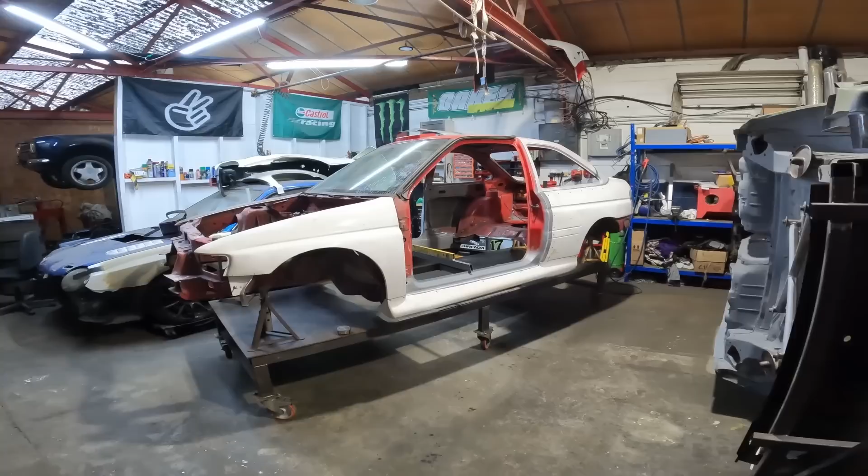For those new to the channel, this is my 1992 Ford Escort Mark V RS2000. We bought it sight unseen off the internet, a Cosworth replica, and as you can tell it hasn't ended well. It's escalated quickly from what should have been a tiny project into a rather large one. We've fixed rust, and more rust, and put so much new metal back in it's almost a new car already. But unfortunately most of the rust was in the floor, which we've cut out, and that's why we're going for a tube chassis.

So we've got a bunch of tube down here, 38mm and 45mm.

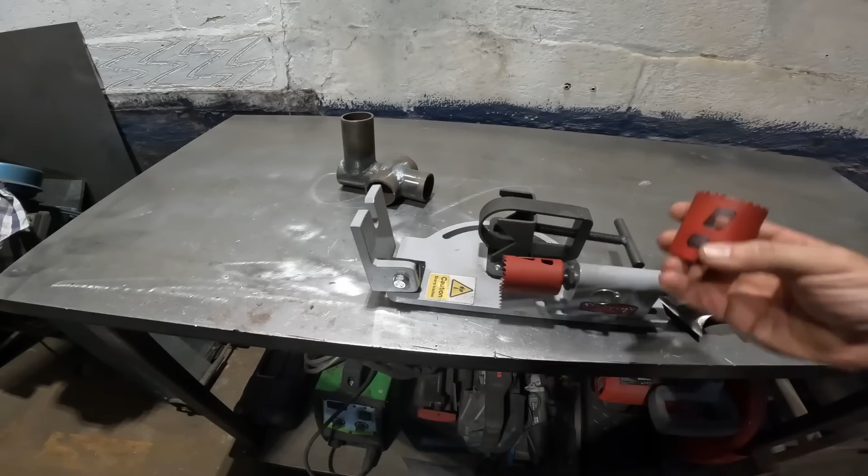We've also got a tube notcher. If you're unfamiliar with what a tube notcher is, you basically put a hole saw in the end there, put your tube through, then put a drill on the end, and hole saw through the pipe, which leaves you with something looking like that. Then you can put your tubes together like that and weld round to make it all as one.

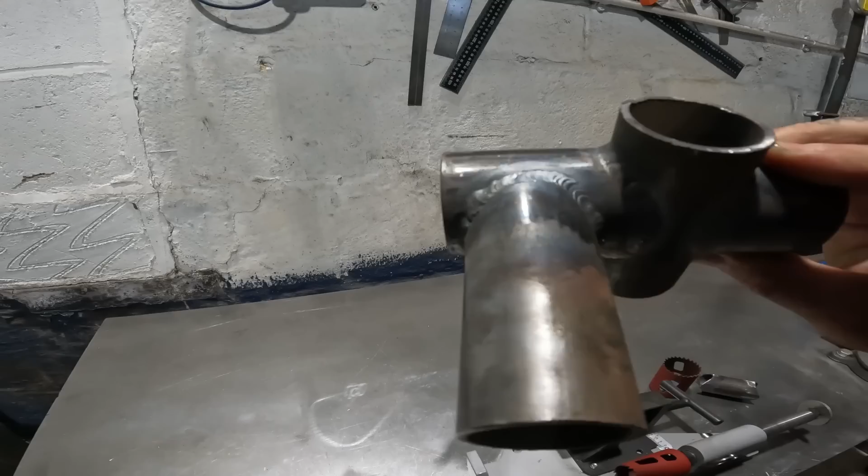Now I've already practiced because I'm TIG welding all this, so far so good. I do need a bit more practice, which is why I've cut some more of these pieces - we'll be going back to this shortly for a bit more practice. But I think without further ado, I need to put you on a tripod so we can finally see what's going on in that box and try and figure out this tube bender stuff.

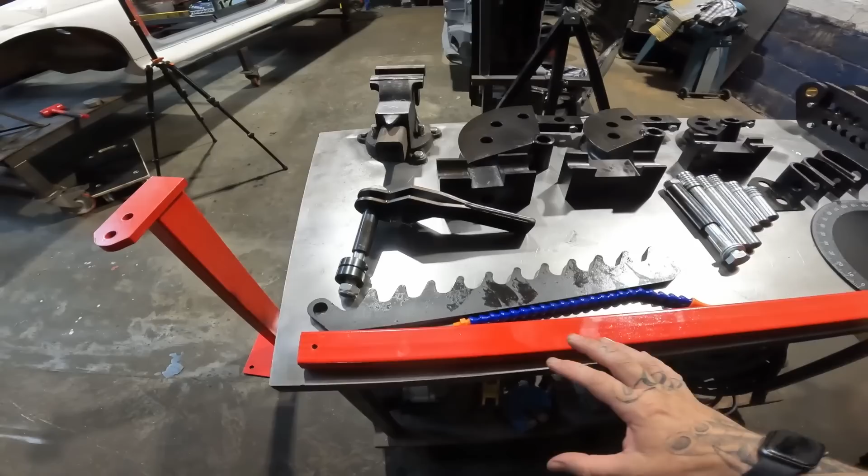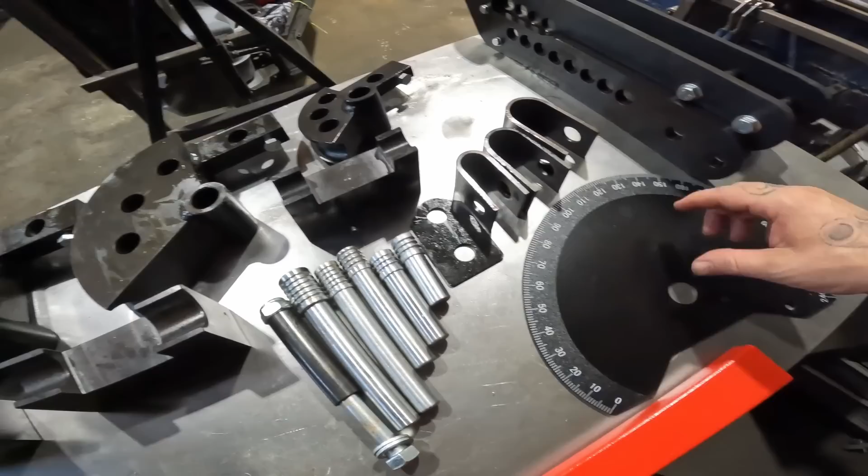Well guys, if you're a big kid at heart like I am and used to like Meccano, you'll understand why all this makes me so happy. We've got a big old Meccano set right now - an 1.75 inch die, 1.5 inches, and 1 inch. We've got all the associated straps, all the bits and bobs, these little bits that slide in through here, and our degree disc which points to tell you which degree you're at when you're bending.

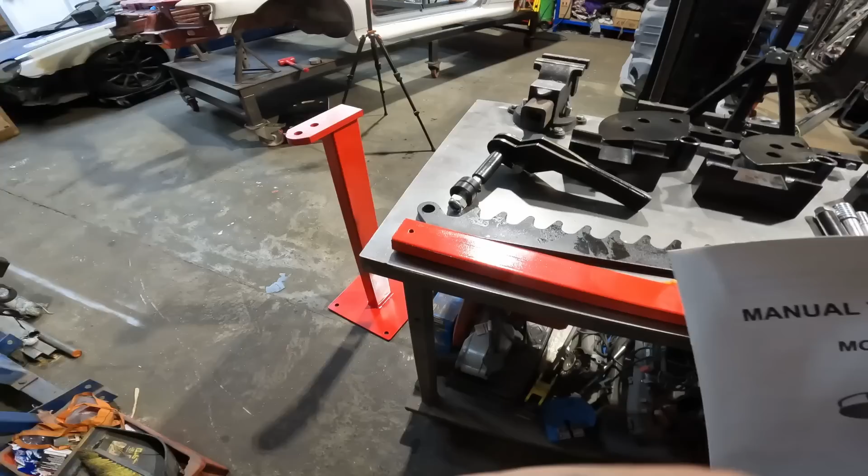We've got a lot of stuff, but I think for once in my life I'm actually going to read the instructions and see how I go about building this thing properly, because I don't fancy it falling over or coming apart whilst I'm trying to bend a tube - that would end very badly. So I think I'll pick you guys back up once this is all assembled and we'll pop a tube in there and see how well it bends some tube, shall we?

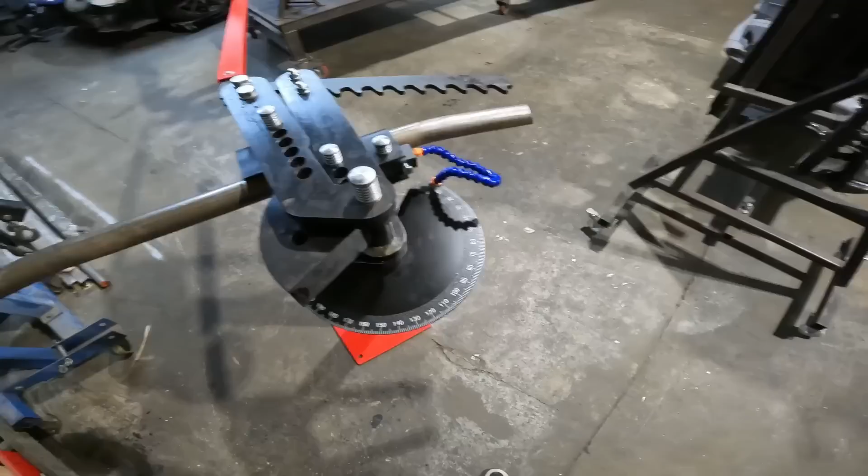Look at the size of this thing, man. It is absolutely huge, what a beast. It weighs a ton as well, but it is such a cool contraption.

Obviously you've got all these pins here, these lock various things into place. I'll go through it more when I start pulling bends on it, but this is your indicator of what degree of angle you've pulled on the bend.

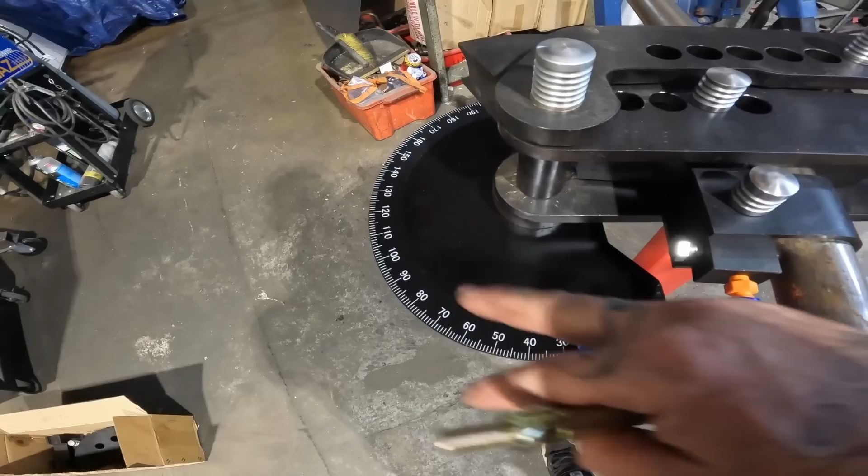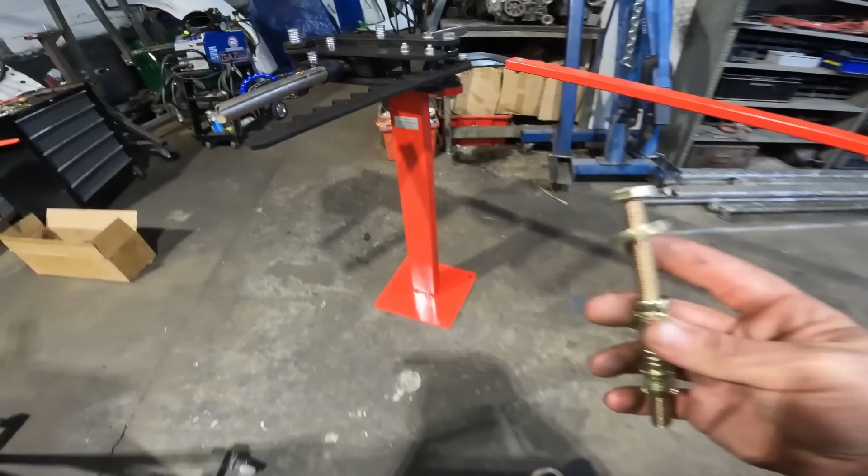That is as far as I can go with it for tonight, because unfortunately I bought these little M10 bolts to fix it down. However, now I've got it out, there's a lot of wiggle room on that, so I think I'm going to change these to M12s, because I don't really fancy pulling on this and then this shears off, everything topples over and I have a real bad day.

So we're gonna get some M12s tomorrow. We'll fix it down here, which then will give me enough room to have the handle going that way to pull back that way. The tube can then shoot off down beside the table here, and then I've got all this space here for the bend to form in. So all in all, it's actually worked out quite well, the location I'd planned for this. I'll pick you guys back up tomorrow once I've got some new bolts, and we'll send it on this thing and see what happens.

Alright then guys, we are there. We've got our M12 bolts, we have got a 20mm drill bit to suit said bolts, and we've got these square washer plate spacer things, because as you can see, the tube bender is currently not level, so we need to pop a couple of these underneath this right hand side to level it off, so when I pull my main hoop, the left hand side of the tube is going to be at the same plane as the right hand side, because otherwise you'll have wonky feet and it'll look a bit pants.

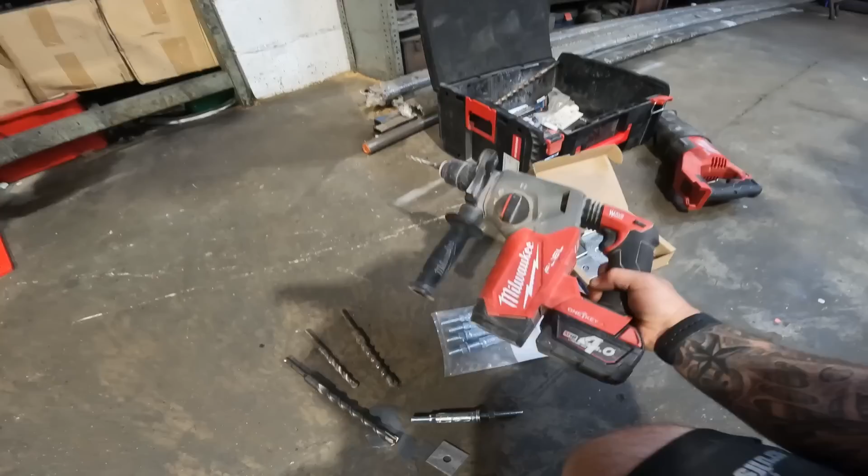But what we're going to do, folks, is we're going to go through with a 12, 16, and then finally the 20, just so I don't go murdering that 20mm drill bit on the first hole. So we'll step it up in stages, and hopefully that'll keep all drill bits looking a bit more happy for a little bit longer. I'm going to put my headphones on because this is going to get dead loud dead quick, and let's send it, see what happens.

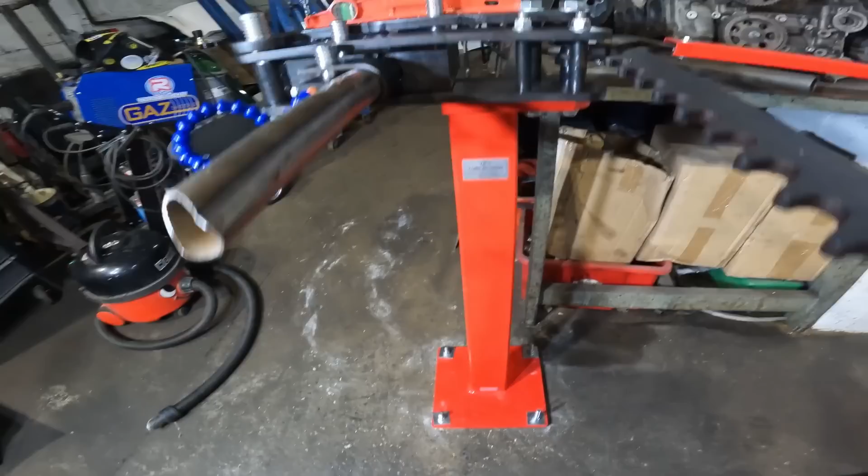We are ready to party, folks. It is fully bolted in, just need to cut the tops of the bolts off, and we are fully level. Can't get better than that.

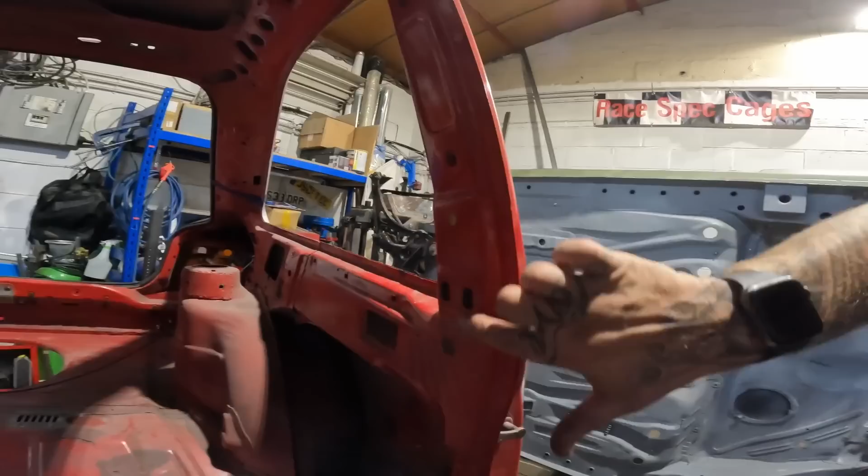So I just need to pop John's bit of scrap tube out here and then chuck in my bit that I've just cut, and we shall pull our first 90, which I need in order to get certain angles and measurements for making bends and things like that. So let's pop this tube out, I'll chuck the other one in and we can pull our first bend finally.

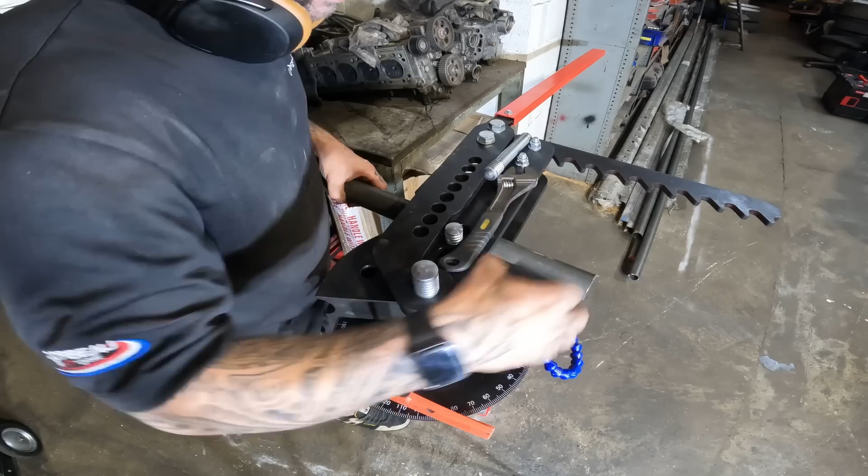All right, let's see if I can show you guys how this thing is all set up. So you pop your tube in there, pop your strap round the tube, then you've got a pin that goes in there. Bit of a pain sometimes to line up, but that is in there. And then you've got your former bit that follows the bend around there, which is underneath. Pop the pin through that. There we go. And then when you've got all of that in there, you've got this little nut or bolt here, tweak that up so it's nice and snug. And essentially, at that point, you're ready to go.

So next step after that then, you've got to take the slack out of the tube on all of this die and whatnot. Make sure you're zeroed. And then go full send. Let's do it.

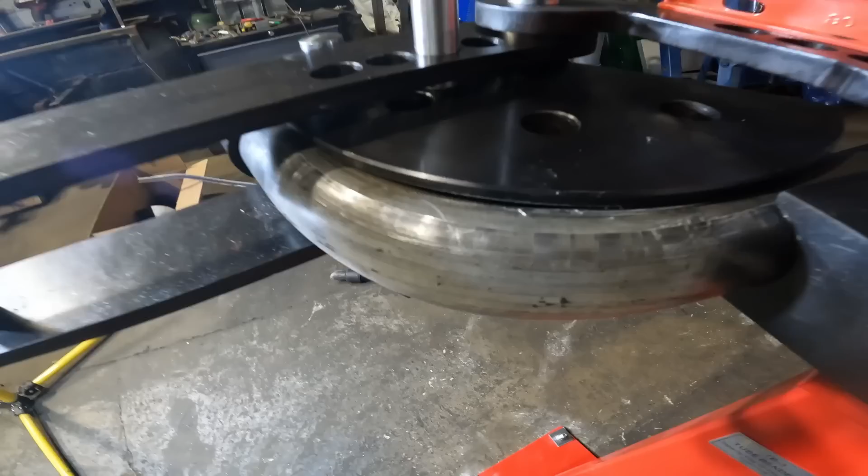Well Houston, we have a little dilemma. I don't know if you can really tell on camera, but once you get to 70 degrees, the tube doesn't want to follow the die and it just starts trying to punch outwards, which in turn is kinking it. So this is my second attempt. This is my first attempt, and again, at 70 degrees, it done that. So I thought, all right, maybe it's something I've done. So I cut another bit of tube, chucked it in, 70 degrees, done the same thing. Not only is it doing that, but it's also heavily marking all this tube.

So there's these gouges around here. It seems like every time you stop to ratchet it back, it leaves another gouge. So it's got to be something to do with this die here, digging in somewhere.

Overall guys, I'm not very happy with this thing. I've spent a lot of money on this and it's just not working. Build quality overall is absolutely rubbish. There needs to be some shims or something in there. As much as it's a cool thing, I'm not very happy.

So I need to contact this company tomorrow, see what they're willing to do about it. Until then, I'm kind of held up. I'll speak to them tomorrow, see what they're going to do, and I'll catch up with you guys next time.

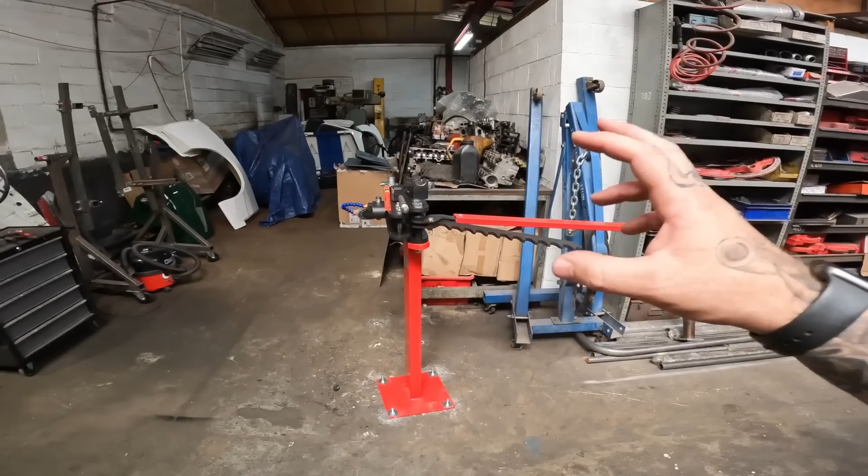Alright then guys, what a two weeks I've had. This has been an absolute nightmare trying to get this thing to work. We've finally got to a point now where we've got what I now know is called a cheater pipe, or tube. I know people get funny about that, but let's have a chat about this.

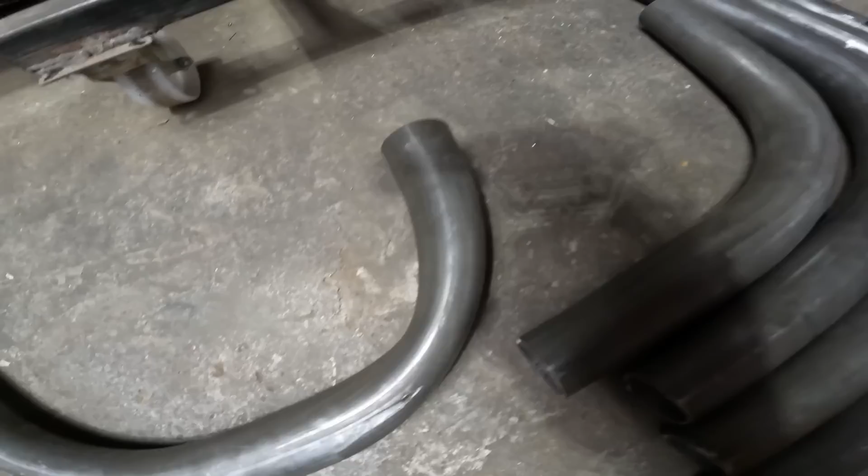As you can see, I've got a small selection of the scrap still here with me, but I've actually gone through an entire 5 metre length of 45mm CDS tube trying to remedy this. You can see it's gone through various stages of kinking over, slowly getting better, and finally we got a 90-degree bend out of it.

Let's have a quick chat about what I found the issues to be. The first one was this U-clamp - your tube fits in there, you pinch it down, and that should stop the pipe wanting to wander out. But the original one I had was too loose, so I had to physically weld the tube to that edge to stop it pulling out, which isn't ideal.

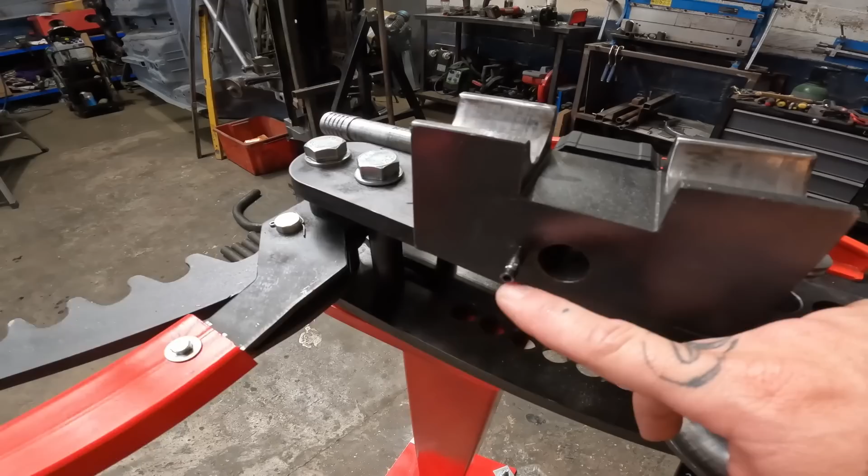The other issue I found was this little dowel pin wasn't set correctly, so it wasn't sitting parallel to the die, so I've sorted that out. The other issue was this edge here was so sharp it was actually gouging into my pipe and causing all sorts of damage on the tube itself.

So I sorted that out, rounded it all off. Inside the follower you can still see the machining marks, but imagine a set of pliers with teeth inside - that's basically what I was dealing with, it was gripping hold of the tube. I've sanded all that out, smoothed it off as best I can, and I'm lubricating it now when I'm trying to pull a bend.

So we are finally there. Would I recommend one of these? No, it's been way too much aggro. I've never had to work on a tool in order for it to work before. So save up a little more, get a JD Squared one or something similar, because that thing's just been driving me nuts. But enough of me bitching and moaning about that.

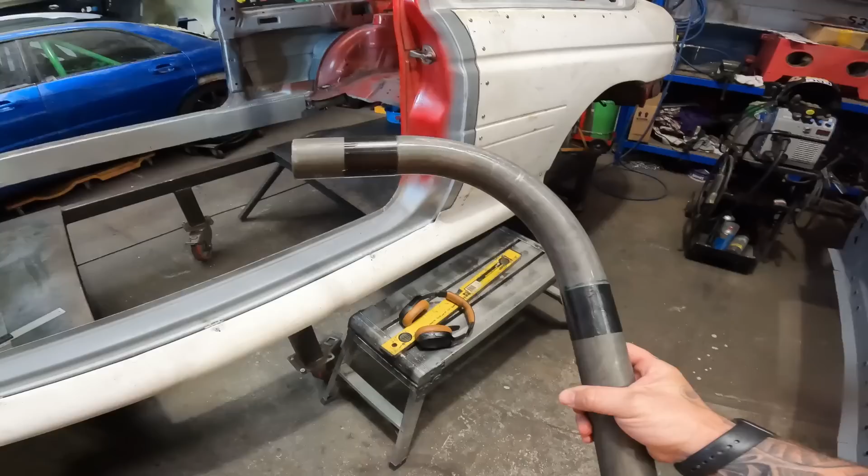What we have here is a cheater tube. Essentially you pop it up where you need your bends, and where I've taped it indicates the start of my bend in the tube bender. We basically need to go around, mark this up inside the car, and that will give us our measurements, and then we can start pulling hopefully the main hoop for this roll cage. Let's get in the car, measure it all up, and see where we end up.

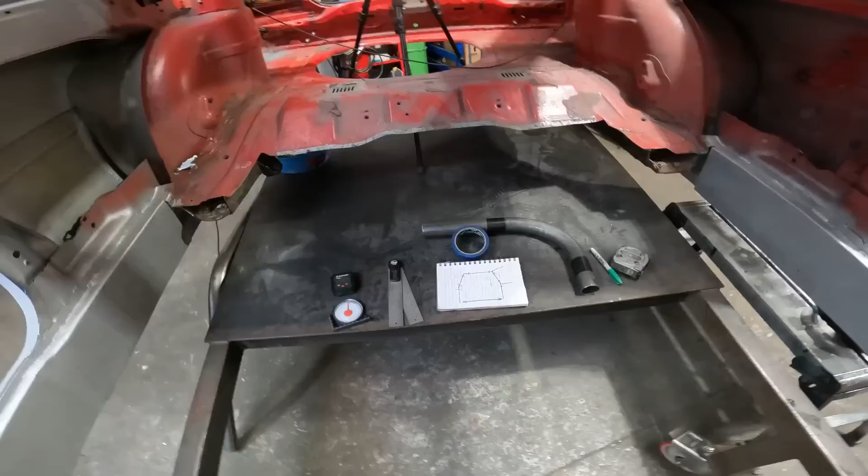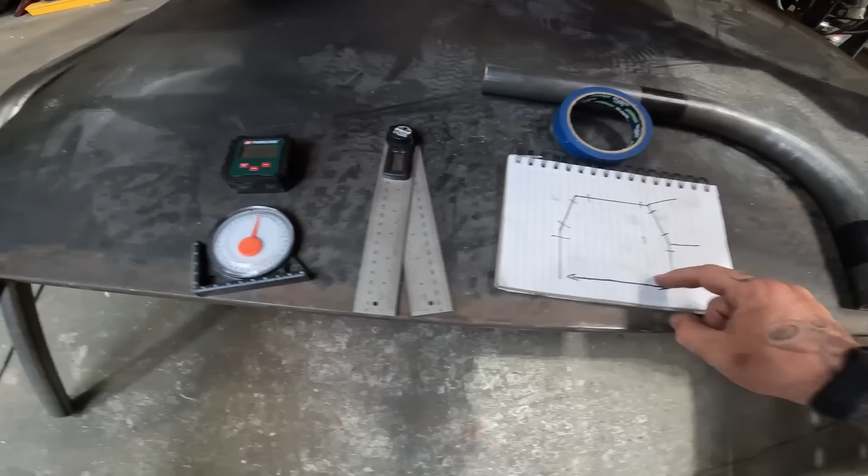Alright, let's go through some tools you're going to need before I begin measuring anything. You're going to need a tape measure, a pen, cheater tube, roll of masking tape, a notepad - highly important if you're anything like me, because you'll end up forgetting your measurements. And you're going to need some sort of angle finder - a ruler type angle finder, a protractor, or a digital angle finder. I'm personally going to use this digital angle finder. But once you've got all that together, the main thing you need to do first is get your rough measurement for your main hoop.

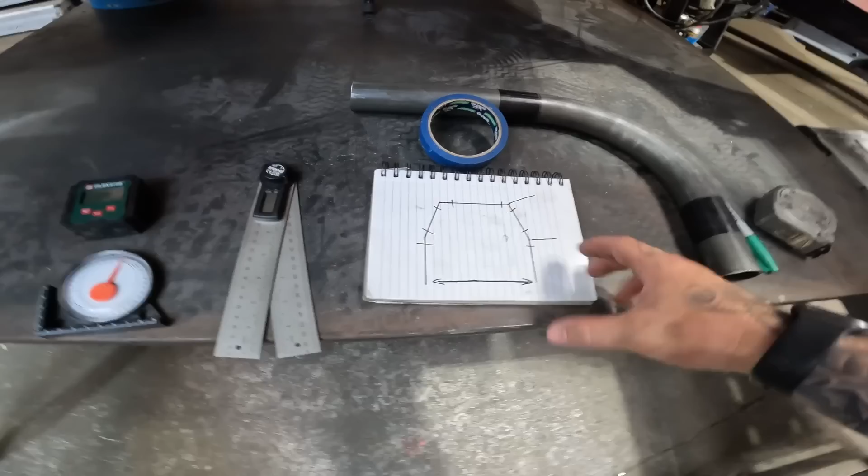So what we're going to do is get the tape measure, keep it nice and snug to the body, measure up from the sill all the way up the B pillar, across the roof, back down that B pillar. That will then give us our rough overall measurement for this main hoop tube. Obviously we'll have to cut a little bit off the bottom when all is said and done, but that will give us a shorter bit of tube to work with rather than working with a whole 5 metre length.

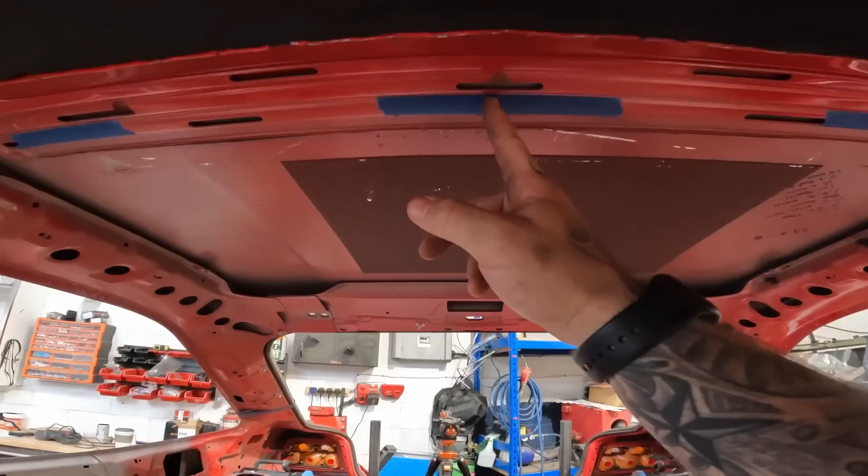So after we've done that, we need to work out the centre point of the car. Everything measurement wise and bend wise is going to work from this centre point to keep everything symmetrical. So we'll find the centre point, and then using our cheater tube we will mark out roughly where the first bend starts, and same again where the second bend starts, and then like I say, everything should then be symmetrical across the car rather than having this side bent up here and the other side bent down there.

That's the theory, at least anyway. Hopefully I don't balls this up because it'd be very costly. So yeah, I think without me waffling on too much longer, let's pop you in the tripod and we'll start taking some measurements and then hopefully make our way over to the tube bender very soon.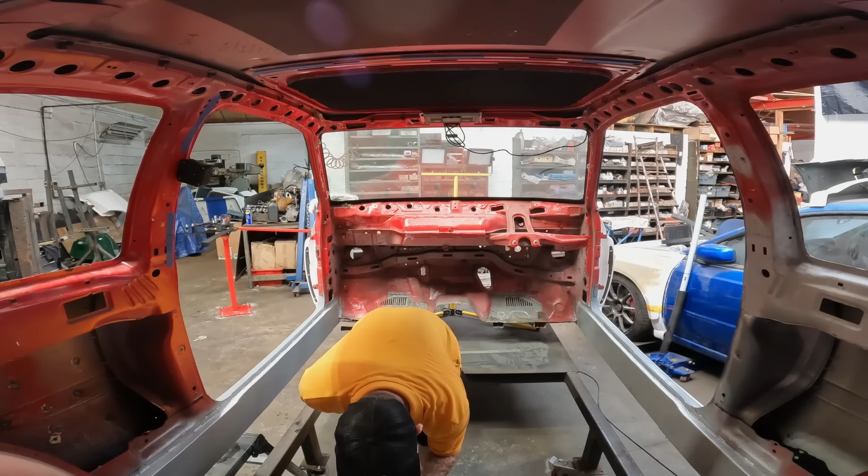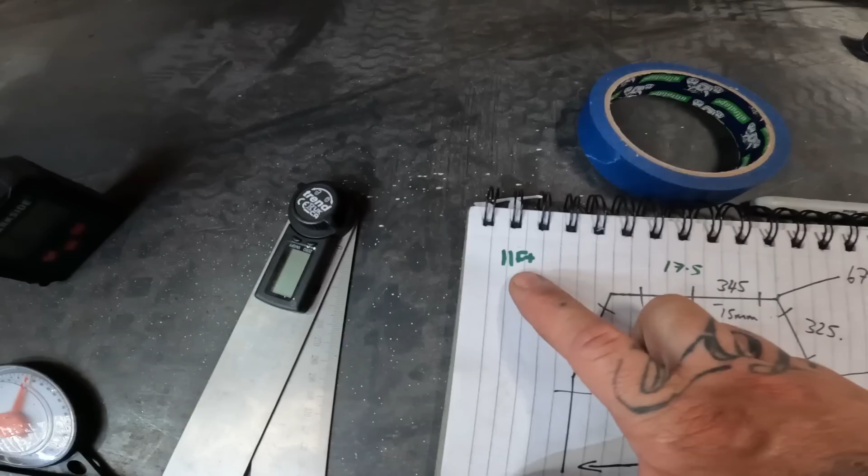That was nice and easy, folks. That weren't too bad at all actually. So we've finally got all of our measurements. Start to finish of our main tube needs to be 11 foot roughly, so we'll cut that out in a minute. Our centre line worked out at 17.5, so we've now got our centre point to work everything back from.

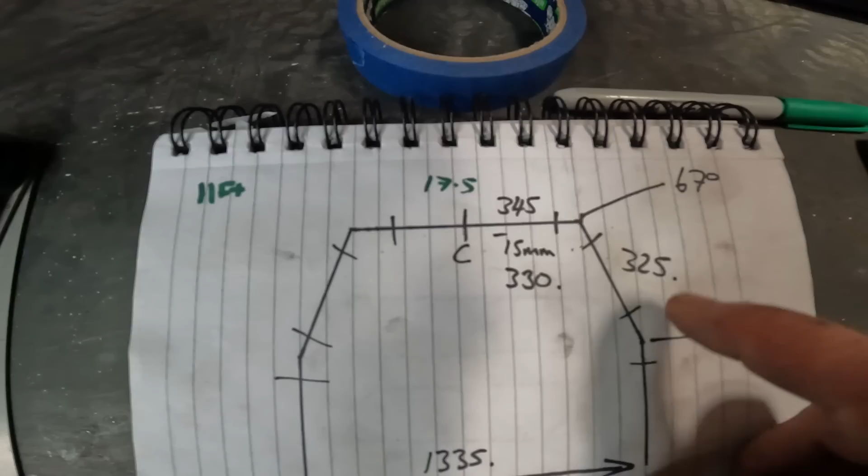This measurement here, 345. Now that measurement is based off this cheater tube being nice and snug up against the body of the car. However, I don't want my roll cage to be that tight, so what I've done is given myself a 15mm allowance there. So we'll take 15 off 345, that will give us 330 from the centre point to the start of our first bend. This measurement from that bend to that bend will remain as 325, and then we've got to pull the first bend at 67 degrees.

So that is the roof line down the A-pillar. Now needless to say, from the centre point to here needs to work out at 90 degrees. So that leaves us with a 23-degree bend to go on here. And then obviously overall it needs to be a complete 180. So yeah, it's all exciting times.

Right, let's go and cut a bit of tube out and chuck it in the tube bender, and hopefully I won't screw this up, because I'm actually quite excited to see a tube in here finally. Right, let's go and cut some tube up.

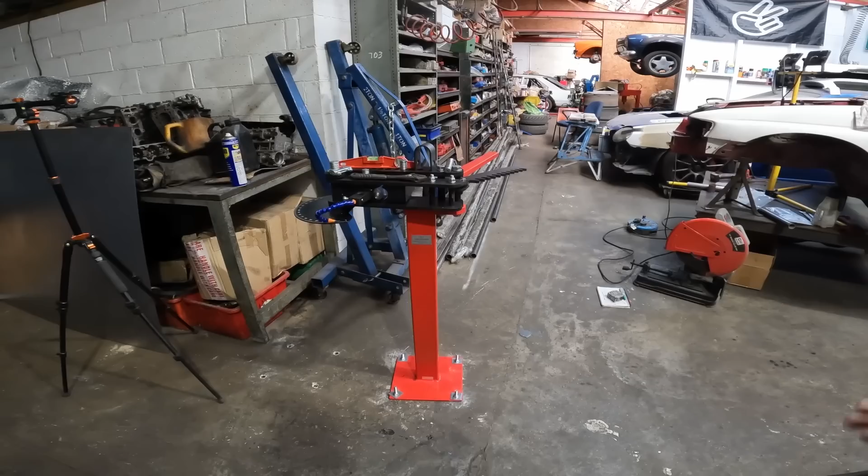Can you believe it, folks? It has gone and kinked the bleeding tube again. Honestly, I have had enough of this thing, and for a better word, it is pissing me off. I've put so much time into trying to make this thing work that I shouldn't have had to put into it, and it's still not bleeding working. My only saving grace with this bit is that I've got a decent bit of length before and after the bend, so I can use it on something else, but what a pain in the backside, man.

Do not buy one of these. It is useless. Right, I'm just going to have to cut up another bit of tube. There's nothing else I can do at this point, but it is not all roses, boys and girls. It is not all roses. Right, let's cut another bit of tube, and hopefully we can do something to make this thing actually bend it properly.

Well, I'm afraid I didn't film any of the bending of this because I was a little bit apprehensive as to whether or not it was even going to work. So I had Dean pop down for a little bit. He's given us a hand briefly, and we've ended up with this. Although it's still not 100%, it has flattened off this outer edge here ever so slightly, but it is usable, so I'm going to go ahead and carry on with it.

So the next step is to measure down to here for our second bend. Same again on that side, and hopefully with those only being 23 degrees that we need, it's not going to do any damage to the pipe. So let's measure these out, and then we'll chuck it back in the tube bender. Hopefully have a main hoop very, very soon.

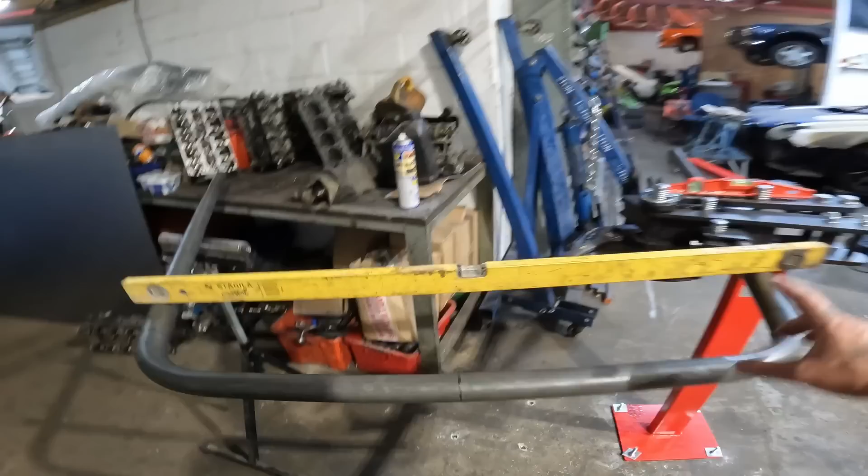We are locked and loaded, folks. We've got the level on there. This is something I haven't brought up yet, but when you're making your main hoop, when you're starting to bend the opposite leg to that one, you need to ensure that side is level to that side, because otherwise one's going to be up and one's going to be down, and it's not going to be a fun time. So we are nice and level.

And we are locked and loaded and ready to go. So let's hope and pray this thing doesn't screw this bit of tube up now, because that is going to be a bad time. Nothing else to it. Let's have a go and see what happens.

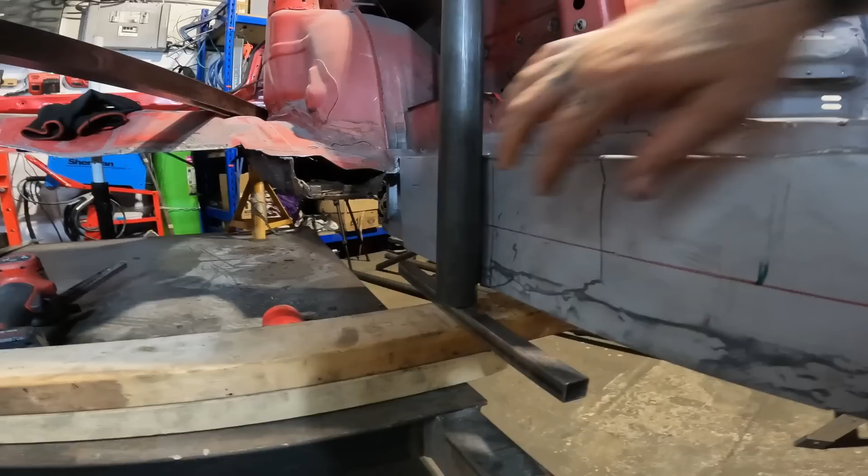Last thing left to do on this is just trim off the bottom down here, but I need to finalise where my box section's going in down here before I do anything too hasty and cut this down too short, so it's stupid.

But I will be honest with you, it's not all roses. I have had a fair few cock-ups, and yeah, it's not come naturally to me. All this is actually quite hard. So anyone that does this on a daily basis and can knock one of these out in no time at all, my hat is absolutely off to you. Yes, it's a fine art, shall we say.

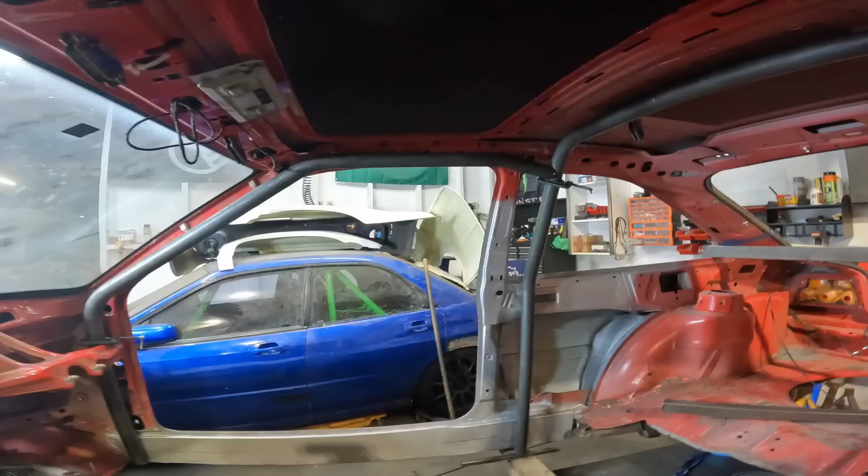But in the process of trying to figure all this out and learning things and whatnot, I've not really been doing a great job at filming, and during me learning and whatnot, I've ended up with my first forward hoop, or bar, or whatever the terminology is for that. The only thing left to do on that is finish off the notch there, so I will get into that a bit later on.

But I think for the here and now, what I want to do next is actually move on to this side and get this forward hoop in. So next step is going to be chuck another bit of tube in this horrible thing and see if we can bend up the next section without ruining it.

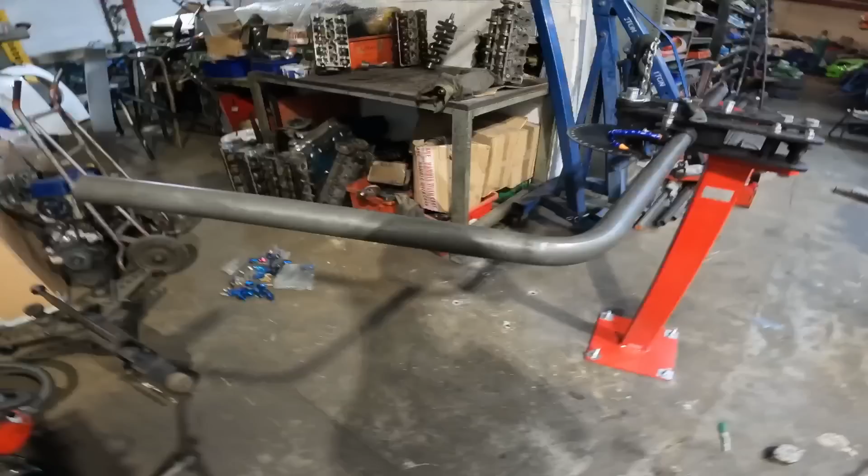Right, well let's interrupt here quickly and have a little discussion about offset bend. Now with the forward hoops, you have to account for the fact that on a car, although your roof level comes straight, your windscreen comes down at an angle and then you need to go straight down to the floor at that point. That is your offset bend.

Now I scoured the internet trying to find a decent explanation or videos on how you actually work that out, and I couldn't find nothing. So all I've done to work that out was simply put a spirit level up in this corner where I wanted my tube to land, held it down level, and then measured from that to the side of the sill, which worked out at 8 inches. So I've relayed that into the tube bender and it worked out perfect for that side. It was an 8-inch offset bend.

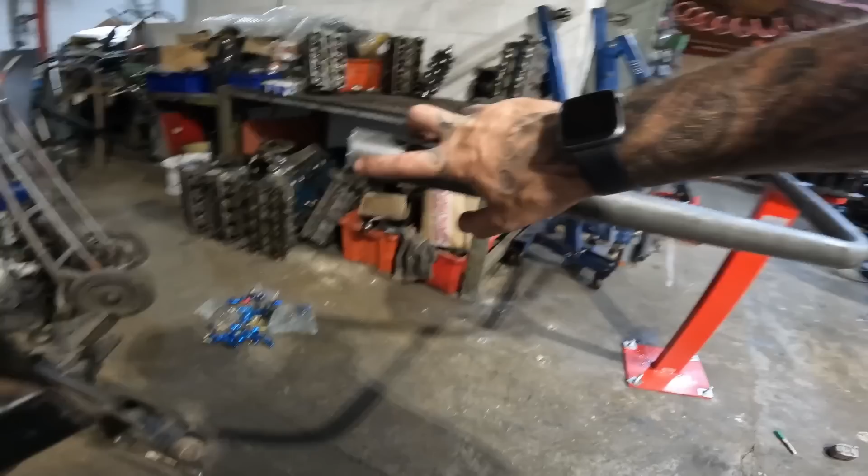So what I need to do now is basically set a level across here, make sure that's dead level, and then I'll measure from the floor to the center of my tube, and then I'll either raise it or lower it 8 inches to get my offset bend. Now obviously if you lift it, it will bend it one way, if you lower it, it will bend it the other way. So I have taken a note of which way I bent that one initially, so I'll bend this one the other way, and then I should get the tube bending down there and then down there with any luck. So fingers crossed, let's carry on.

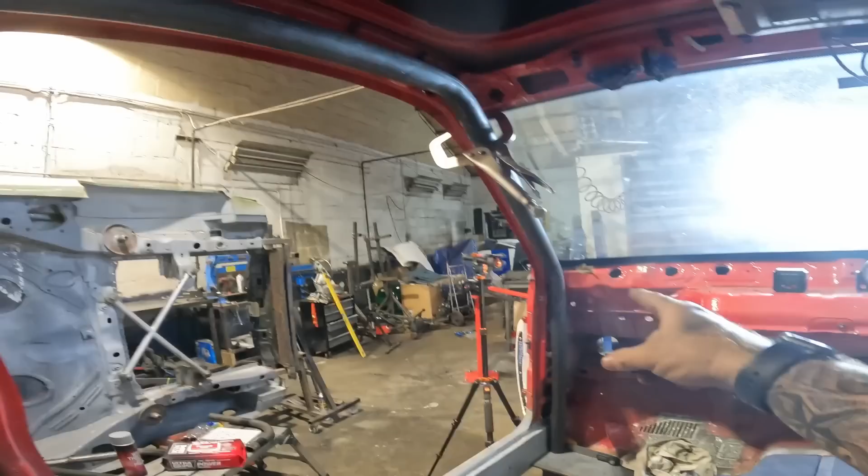But yeah, she's in, she's looking good. Fitment's pretty much on point. Once I've notched this, all of this will move over closer to the car, which will be ideal. So that is basically it for this. Just need to notch that, sort out that little kick on that bend, and then we're good to rock and roll. Then we just need to finalize that notch there, and we're pretty much golden.

So yeah, needless to say, I'm pretty stoked with how that's turning out now. We're actually starting to make moves in the right direction finally, and it is looking pretty good.

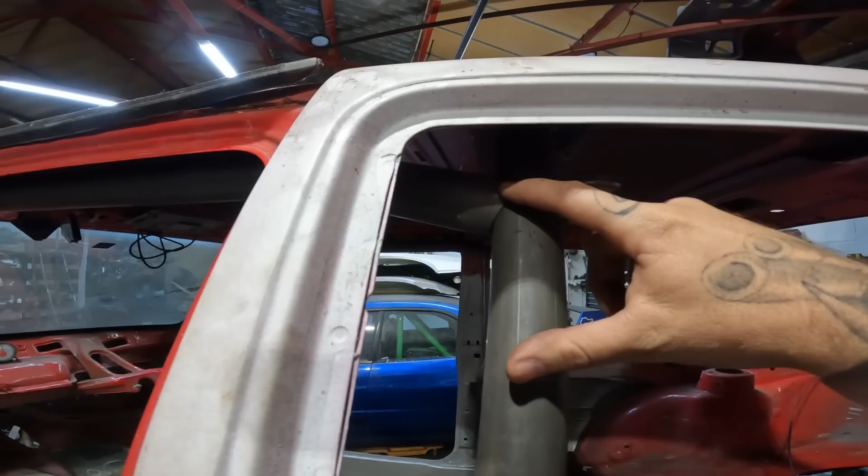All I need to do is put a little bevel on the edge here where we need to weld it, but we'll do that when we come to weld it. Overall, I am absolutely made up with that. These are basically the mirror image of each other. All the bends are in the same places, the heights are the same. Yeah, I couldn't be any happier with that.

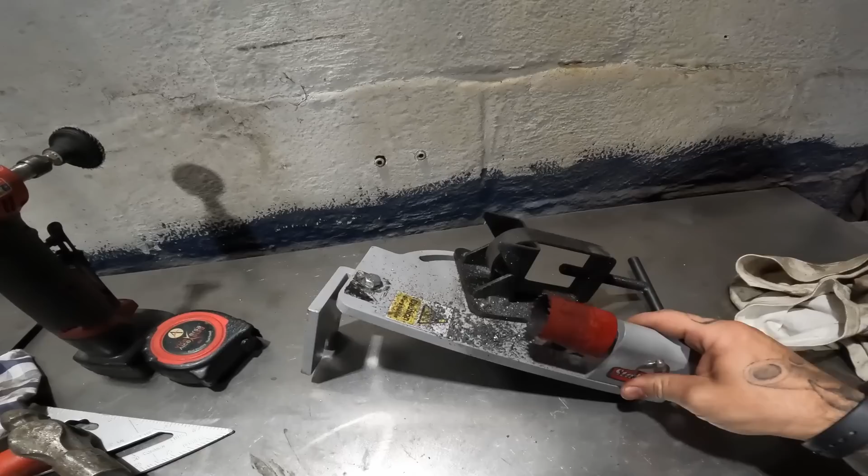As you would have seen, I did use the tube notcher for that, which, if I'm honest, this thing is an absolute faff to set up, so I don't think I'll be using it anymore. As you can see here as well, I've had to space this back section up because this cuts off center to the tube ever so slightly, which isn't ideal, and I ended up using the flap disc on the tube anyway just to finish it off. So I think from now on we're going to cut our rough profile with the grinder and then finish it off with the flap disc on the other grinder, because it just seems so much quicker. You don't have to set anything up, you just literally do it by hand and figure it out. So yeah, happy days with that.

But as you can see, it is all held in with a multiple array of different clamps and whatnot, and being in there with all this just being held up by clamps is a bit daunting, because I'm kind of waiting for one of these tubes to fall over and hit me on the head.

So I think the next step is going to be making our perimeter around the inside of the car here. For that, we are going to be using some 40 by 40 box. The plan is to cut 45s on the ends, so that side will go onto that with a 45, weld that up, and then I'm going to put another piece in between the two at a 45, and that will triangulate everything and make it nice and rigid. So that is the next step on the agenda.

I've already got the two cut to go front to back on each side. All we need to do now is measure and cut these, and then we can start gluing them together.

Eventually it will look something like that. So once I've chosen my gearbox, I can then cut this section out and add these middle pieces in and do some cross bracing, and that will make all of this nice and rigid. But like I say, for now I still need to get in there and I don't want it to become an obstacle course, so we'll leave that for the here and now.

But yeah, I wish I could say it all went smoothly, but unfortunately when I started welding this in, the inner sill started distorting and going all funny, so I'm left with some gaps along here.

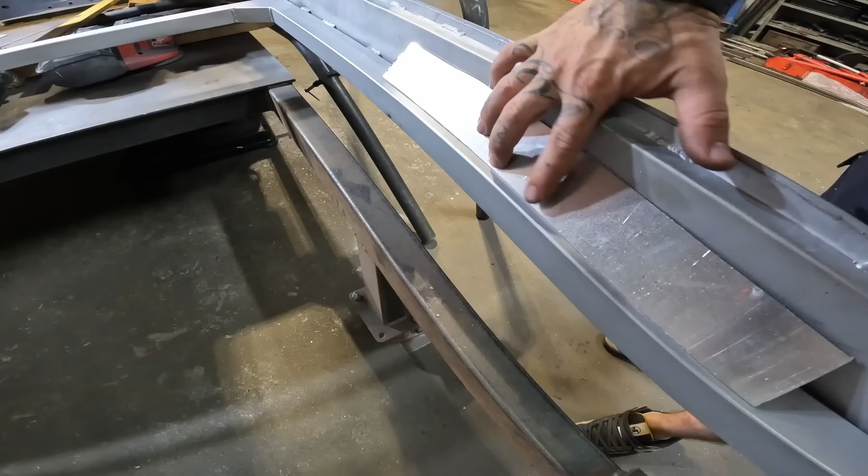So I think what we're going to do eventually is add a 45-degree plate and some dimple dies in this, and we'll do that for the entire length of the inner sill on both sides, just to finish it off, give it a bit more strength, and make it look a bit more fancy.

That's not the end of the world, but the next step is to chuck this main hoop back in along with the two forward sections, so we can mark them out ready to be cut where they need to sit on top of this perimeter. Hopefully this will actually still fit in the car, because if I'm honest I haven't tried it with this perimeter section in, so fingers crossed I haven't made a big boo-boo here. Let's pop it on a tripod and see if I can wrangle this thing back in the car somehow.

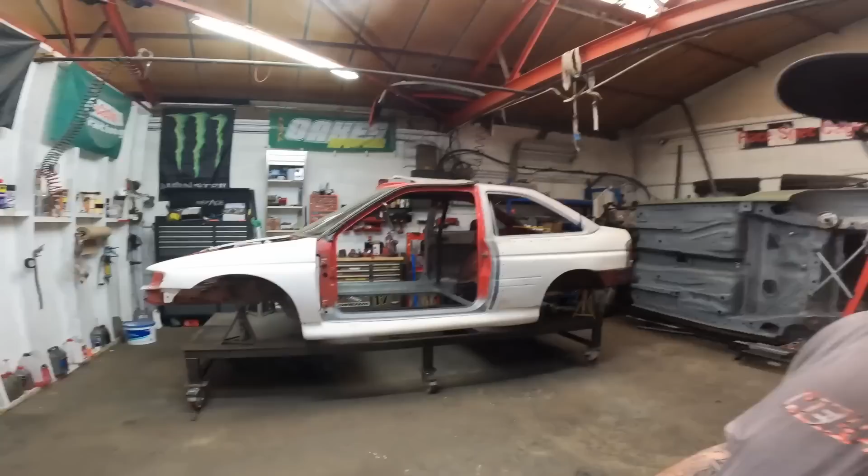So yeah, that's going to be a wrap for this one, folks. It's taken me so long even just getting to this point with all the issues of the tube bender, and me just trying to learn my way around all this roll cage tubing malarkey.